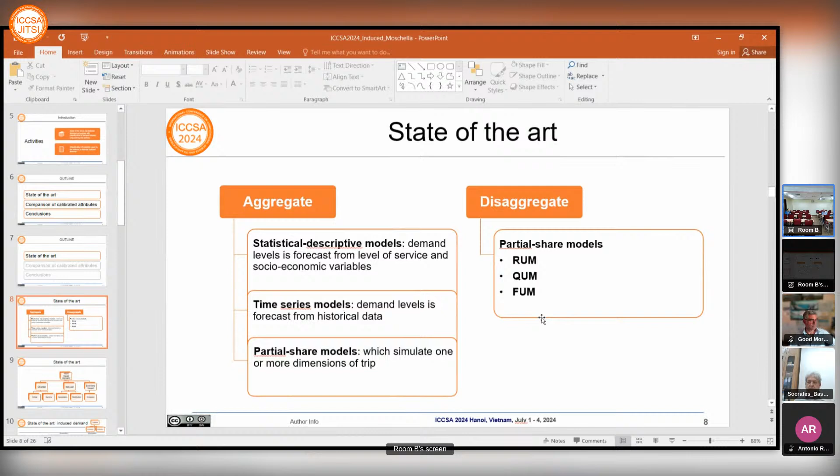The aim of HSR demand models is to estimate three demand components: demand diverted from other services or modes to HSR, which can be estimated with mode and service choice models; induced demand, which directly depends on the characteristics of the HSR service, or is indirectly modified by the traveler's mobility choices, and can be estimated with generation and distribution models; and finally, economic-based demand growth, which is linked to the trend of the national and international economic system, which can be estimated with emission models.

In this slide, I show you the papers reviewed in this work. 8 papers were selected in which the topic of induced demand was addressed, and the selected papers were analyzed according to 6 categories: the social context, like the country; the type of model, generation or distribution; the approach, statistical or probabilistic; the specification of the model; the presence of calibration; and the presence of the parameters. As we can see, most of the models are of the generation type, and they are mostly statistical.

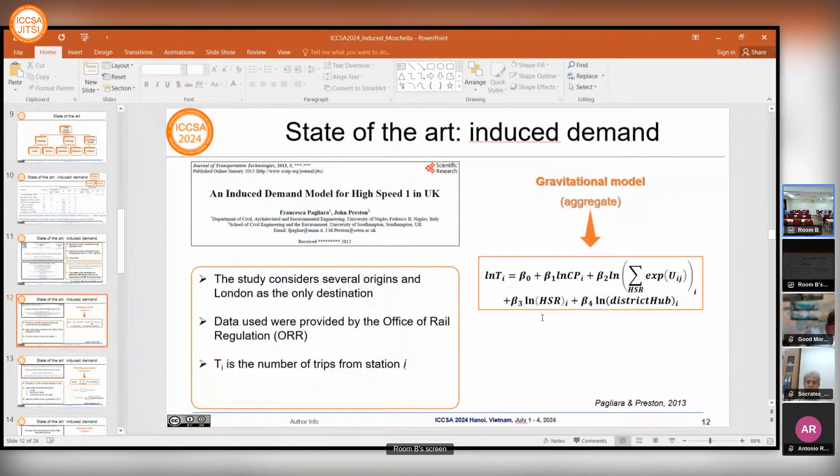In the study of Pagliara and Preston, induced demand is investigated by applying a gravitation model, an aggregate model, with the aim of predicting the change in the number of trips before and after the introduction of HSR in the UK. In particular, several origins were considered, with London as the only destination. For the estimation of demand, attributes of level of service were considered, as well as characteristics of the area where the high-speed rail is located, like the presence of car parking.

Cascetta and Coppola, in this paper, estimate the demand induced by the presence of HSR in Italy. In particular, a trip frequency model was applied with the aim of estimating the probability that a user makes a certain number of trips. The probability in the equation is estimated through a logit model with three alternatives: no trip, one trip per week, and more than one trip per week.

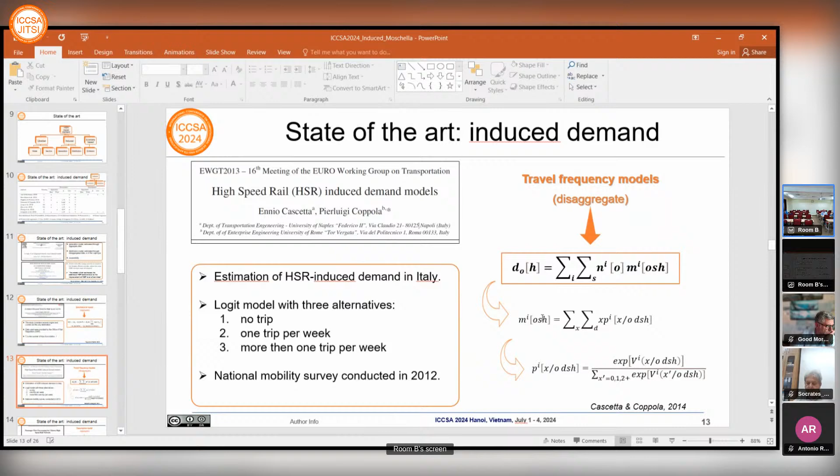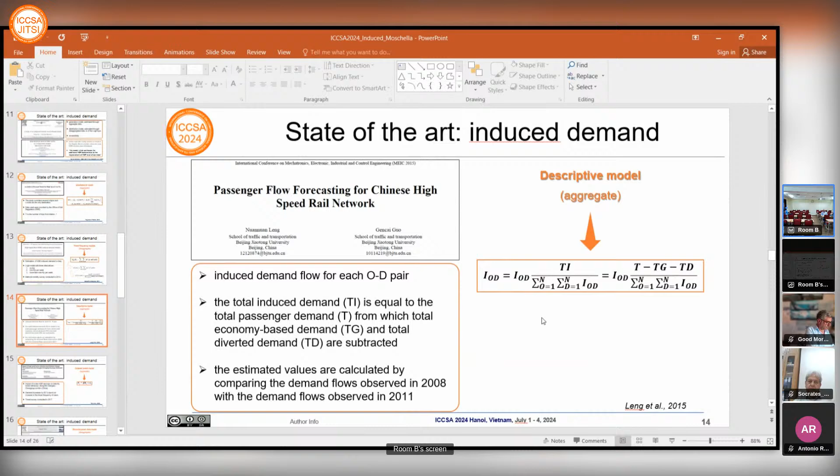The data were obtained from National Mobility Survey, conducted in 2012. Leng et al. estimated the induced demand flow for each pair in the entire Chinese HSR railway network using a trip generation forecast as a reference. The total induced demand equals total passenger demand, from which total economy-based demand and total diverted demand are subtracted.

This paper by Ren et al. analyzed the impact of a new HSR service on intercity travel behavior along the Changchun corridor. The results showed demand increased by 60% due to an increase of travel frequency. In order to estimate the induced demand generated by the presence of HSR, an ordered probability model was proposed by these authors.

The data used for this analysis was obtained from a travel survey conducted in 2011. In the study by Zhang et al., induced travel demand was analyzed in the context of a new mode in the Dallas-San Antonio corridor in Texas. The data were obtained through an online survey that included questions on socioeconomic factors, previous travel experience, and hypothetical parameters of the new mode, and were analyzed using an econometric model.

In particular, the authors selected a negative binomial panel data model. An important element introduced in this paper is the possibility of calculating the induced demand in relation to all combinations of travel time and cost.

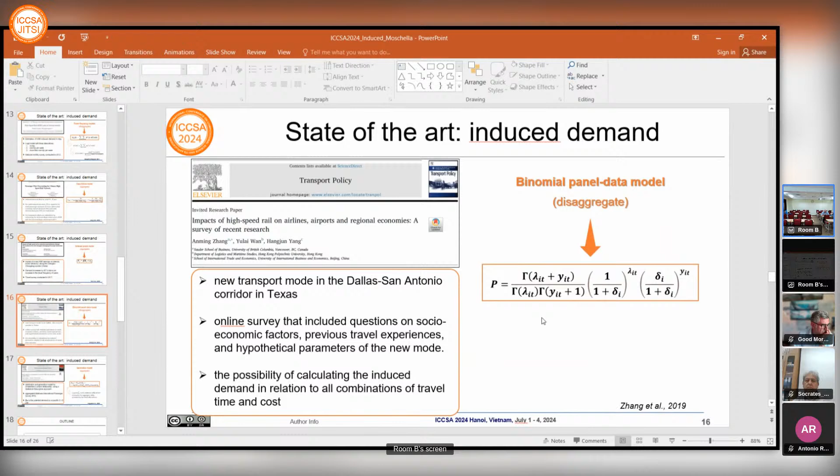The authors Avogadro et al. specify two aggregate models: a distribution and generation model for the Amsterdam-London relationship using a statistical descriptive approach. Of the two models, only the generation model was specified. For model estimation, they used data from the aggregate database International Passenger Survey, and they estimated the distribution model by aggregate regression.

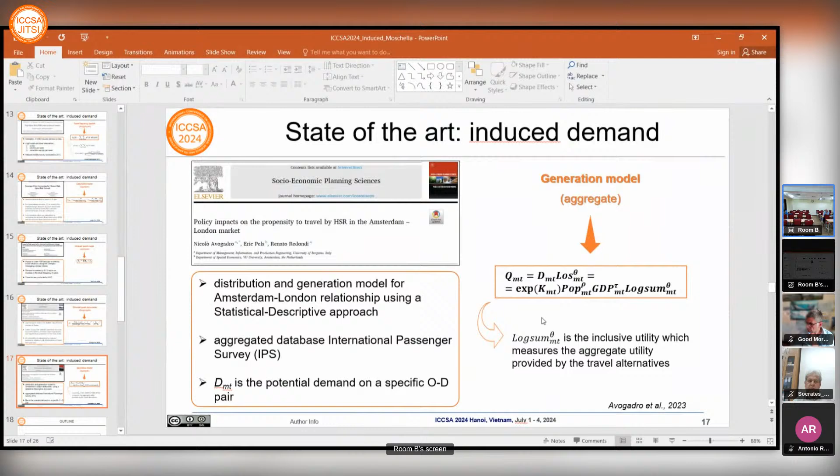The regression captured the difference between the modal share of air versus HSR according to differences between the attributes, while the generation model considers socioeconomic attributes for the OD pair and level of service. In particular, the log sum is an inclusive utility which measures the aggregate utility provided by the travel alternative.

Of the 8 studies reviewed, 5 contained calibration parameters.

The variables can have different structures: dummy variable, continuous variable, and discrete variable. From the comparison of the calibration results, some common variables related to the socioeconomic characteristics of the transport user emerge.

In particular, the gender variable in Cascetta-Coppola and Ren et al. is specified as a dummy variable equal to 1 for male and 0 for female. Moreover, the calibration results show that the value of the parameter is positive in Cascetta-Coppola and negative in Ren et al.

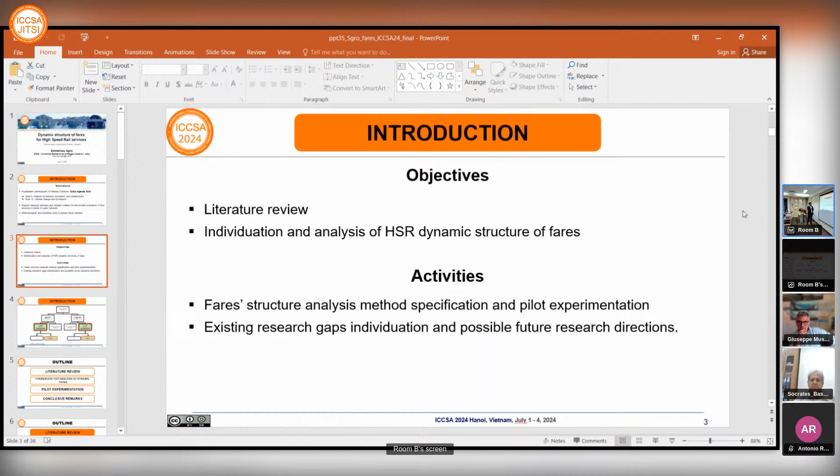We can identify fares as a level of service variable in both of the two main branches of the travel demand model, the aggregated and the disaggregated one. So the presentation is organized into four main sections: the first is the literature review, then the specification of the framework, meaning the specification of the method.

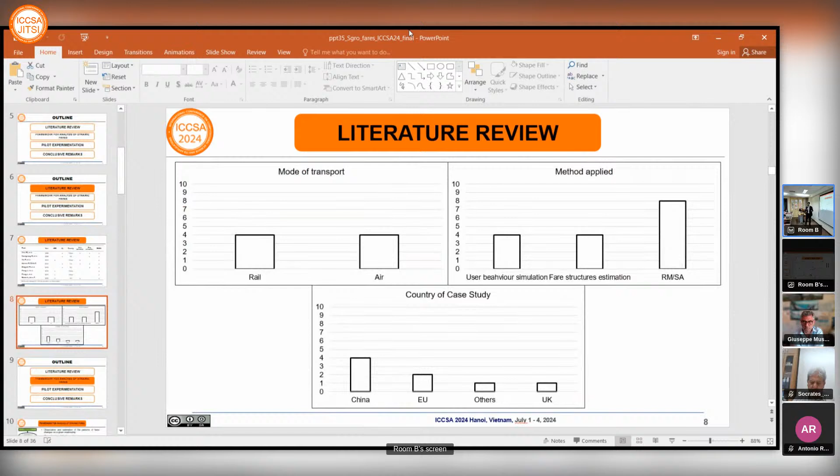In this slide are some charts about the data seen before. This section contains the specification of the experimental method of the fare analysis.

This is organized into three main steps. The objective step is preliminary to all the method, because it's important to individuate the objective of the analysis. In that case, it's the observation and estimation of the changes of the fares over time, on a specific relationship and on a specific country. Another objective is the analysis of the characteristics of this variation over time, and on the other end, the analysis of the services offered by the transport company.

So the first step is the definition of the analysis domain, and we can introduce the first two time variables. The first one is the T variable, that is the day of travel in a year - so when you want to travel.

The second time variable is the P variable, that is the day or period of ticket purchasing - so when you want to purchase the ticket. This is defined by a period because the ticket is not available all the time, so there is an initial P and a final P.

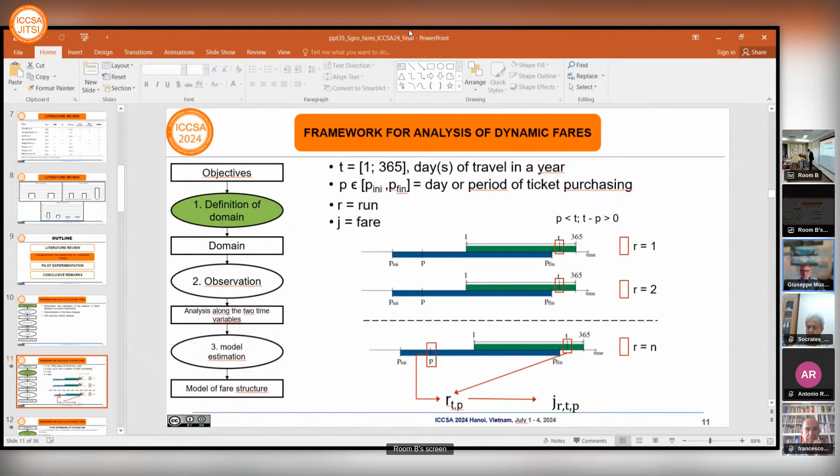Domenico, sorry, we cannot see the next slide. One moment... Are you seeing slide 12? Just a moment. No, I don't see the screen. I see the number 12. Well, we can go on if it's all okay. I asked the chairman if you see the slide, Professor. So I have to continue.

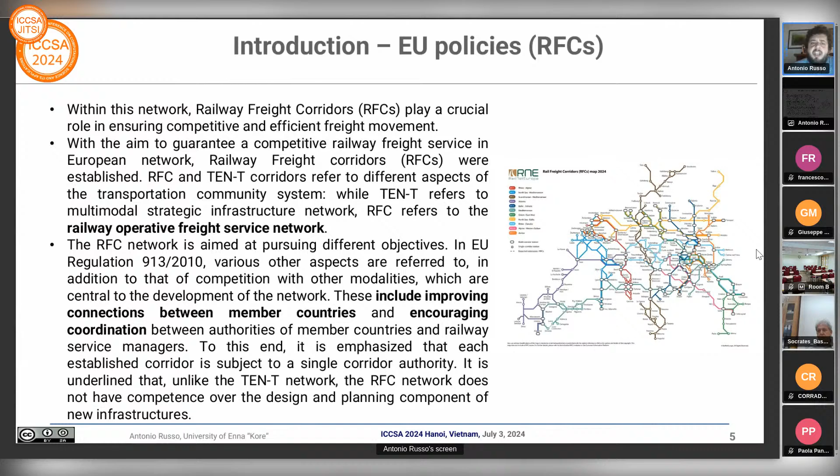The most important difference between rail freight corridors and the TEN-T network is that the former has nothing to do with strategic planning of new infrastructure, which is a main topic of the TEN-T network. On the other side, the RFC works only on existing networks.

The aim of the work is to compare the actual condition of rail freight corridors between Italy and the Balkans Peninsula, the two southern and southeastern peninsulas of Europe that may serve as a gateway from the Eastern world.

In general terms, we refer in this work specifically to 4 corridors: the two main Italian north-to-south corridors, the RFC-3 Scandinavian Mediterranean and the RFC-5 Baltic Adriatic, and the two main Balkans corridors, the RFC-7 Orient East Med and the RFC-10 Alpine Western Balkans, which links the southern Balkan Peninsula with Middle Europe.

The topic of this work is to understand the actual conditions of infrastructure between these 4 corridors, considering a common potential competition area that may be served by both couples of corridors, by both peninsulas, located approximately in Central and Eastern Germany, Poland, Czech Republic, and Austria.

For the modelization of the problem, we modeled it referring to classical graph theory, building a graph with n nodes and n links, each link characterized by specific quantitative elements, performing a Dijkstra algorithm every time we need to calculate the paths between 2 points. So every path is considered as the shortest path evaluated with the Dijkstra algorithm.

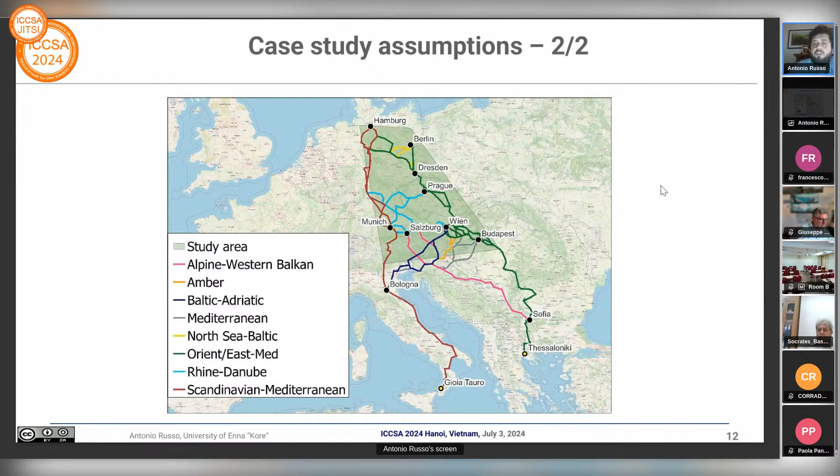These are the best results, the results of the comparison between results for distances to Thessaloniki. Points are marked red if the border between Bulgaria and Serbia is an intermediate step, while they are white if they are in a competition area.

As you can see, all the points from Sofia to Budapest are nearest to Thessaloniki through the Orient East Med corridor, while more or less all the points in the central and western part of the study area are nearest to Thessaloniki through Western Balkans, with a great competition area placed on the axis from Budapest to Hamburg. This may lead to some interesting results that may be discussed in the discussion section of the work.

For the comparison between the two Italian corridors, the situation is clearer somehow, because we have all the points to our north that are nearest to Gioia Tauro, considering the Brennero intermediate step, so the points on the Scandinavian Mediterranean corridor, while all the points in Balkans and other central and east countries will be marked as Baltic Adriatic.

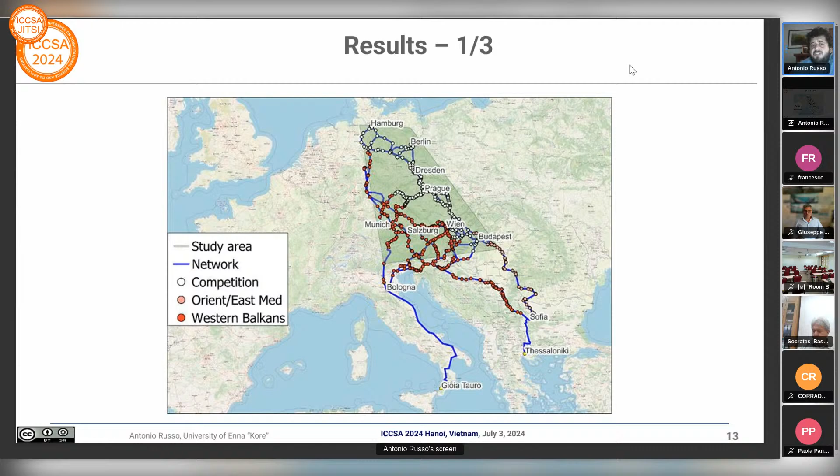So while the Italian situation is more simple, for this case, even if there are points nearest to one city more than the other of the two cities considered, we should consider that the two peninsulas have strongly different problems. The Italian railway network is often subject to congestion, while on the other side, the Balkans Peninsula from Greece to north has various problems in terms of infrastructure.

For the development of successive steps, we worked only on distances, but other parameters may be included to properly construct a cost function, considering, for example, the number of corridors counted as elements, or the possibility to consider duration of stops at borders or at other particular nodes. Another element would obviously be to involve demand components, while this work is essentially about supply elements.

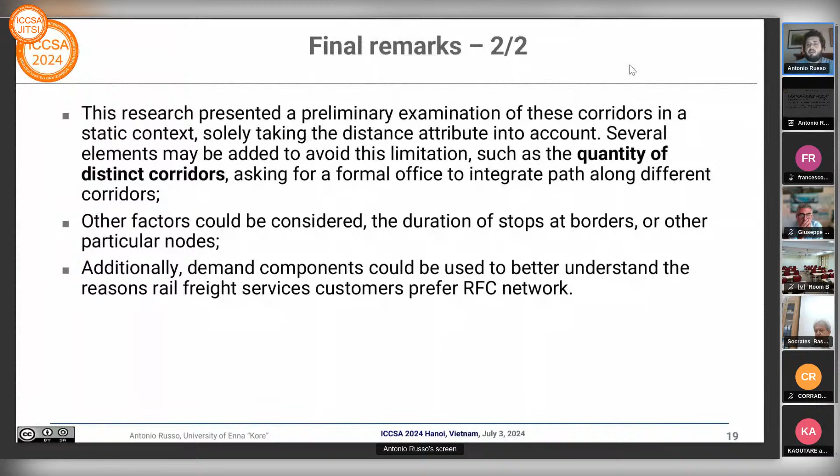Finally, we should consider how impactful Greek corridors may be, other than being competitive for the relationship with Northern Europe, may also be related to the Eastern world through international rail freight corridors with China by east. So thank you for the attention.

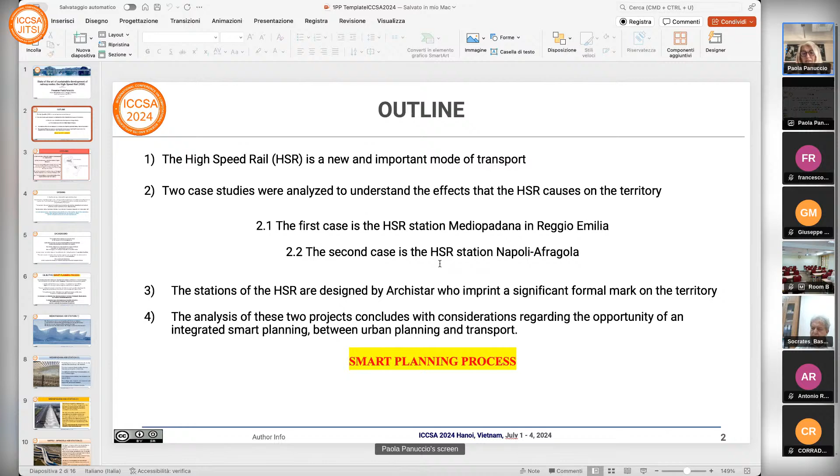These two case studies were chosen because they are two modern stations, both designed by Archistar, but located in socially and economically different areas. The first station is in northern Italy, in the region with the highest gross domestic product. The second is in southern Italy, in the region with low GDP.

In Italy, the territory is planned through restrictive plans. In recent years, important projects with strong transformative impact have been induced by superior choices. As a result, territories are forced to change quickly and don't follow the indications programmed by urban plans. The top-down choice imposes irreversible transformation decided by international directives but not planned by local urban planning.

The inclusion of a new mega infrastructure determines a new territorial identity. The high-speed rail line, which connects cities with the rest of the country, represents a substantial change with significant implications for the evolution of cities and for increasing social and economic development.

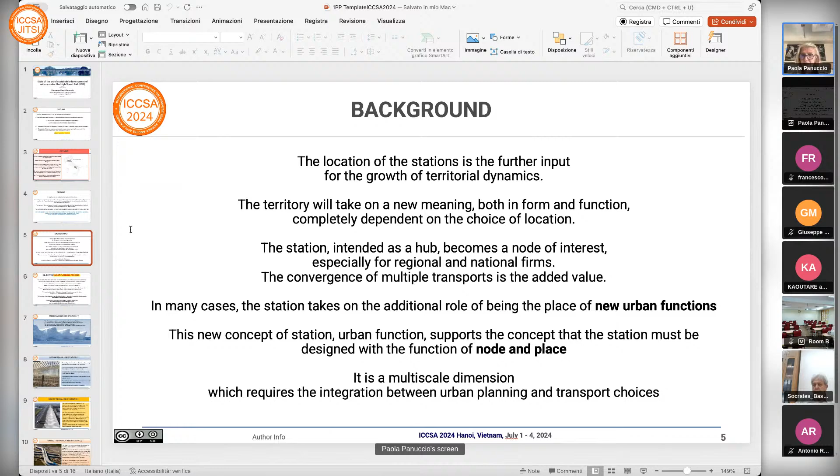The station, intended as a hub, becomes a node of interest, especially for regional and national firms. The convergence of multiple transport modes is the added value. In many cases, the station takes on the additional role of being the place of new urban functions. This new concept of station-urban function supports the idea that the station must be designed with the function of node and place. This is the multi-scale dimension, which requires the integration between urban planning and transport choices.

The location of the HSR station is important and makes a difference to the host territory. The construction of a new station, if planned, will promote local economic growth. It can be said that the success or failure of investment on the HSR line depends on city-region-nation integration and station-city dynamics. Transport networks increase connectivity, stimulate economic growth, and reshape the geographical distribution of economic activity inside and outside the cities.

The construction of stations has significant impacts on the cities to which it is easily and quickly connected. It's necessary to integrate urban planning choices with those of transport infrastructures in an ordinary integrated urban plan. A comprehensive and integrated plan benefits innovations and the transformation of cities into smart cities and the sustainable development of territories.

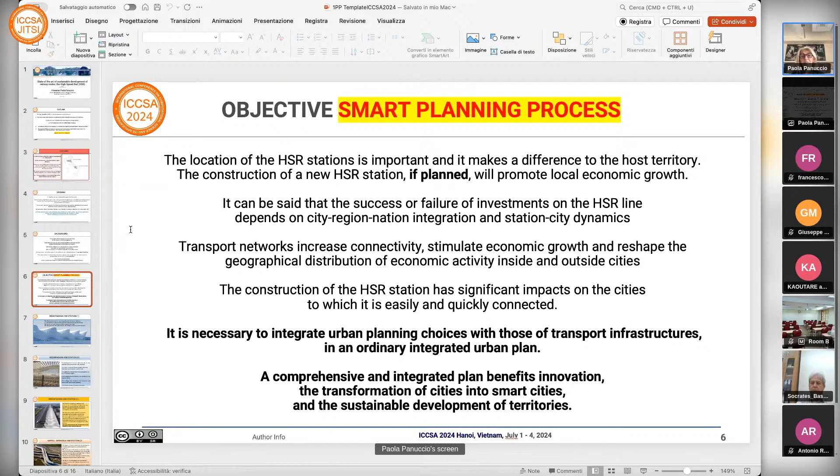Now we present the case study. The first is the Mediopadana station, designed by the architect Calatrava. It is an impressive architectural sign that testifies to its special function. The station is a steel structure, 480 meters long and about 20 meters high. The structure has a futuristic design, and the image is similar to a moving wave.

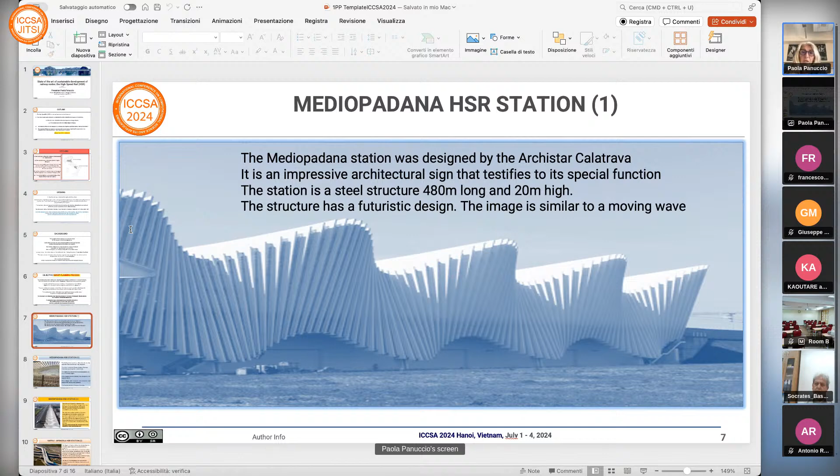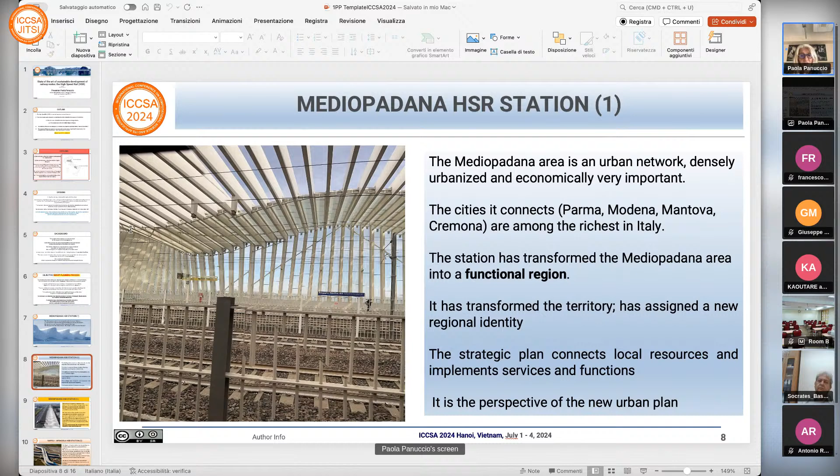The Mediopadana area is an urban network, densely urbanized and economically very important. The cities it connects, Parma, Modena, Mantova, Cremona, are among the richest in Italy. The station has transformed the Mediopadana area into a functional region. It has transformed the territory and assigned it a new regional identity. The strategic plan connects local resources and implements services and functions. It's the perspective of the new urban plan.

The presence of a parallel motorway is an attractive factor. Growth is strongest when the motorway is connected to the high-speed station. Integrated transport connection is considered to be the priority.

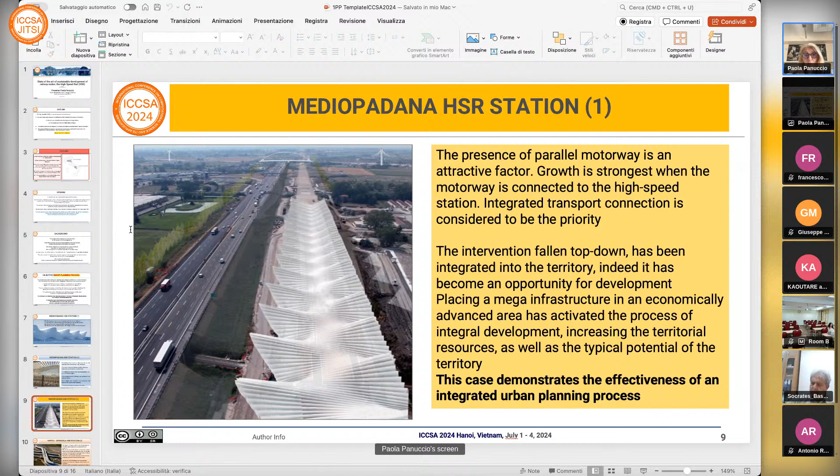The top-down intervention has been integrated into the territory, and indeed it has become an opportunity for development. Placing a mega infrastructure in an economically advanced area has activated the process of integral development, increasing the territorial resource as well as the typical potential of the territory. This case demonstrates the effectiveness of an integrated urban planning process.

The Napoli-Afragola station was designed by the architect Hadid. It is a strong territorial landmark, and the central part of the station is characterized by a large sinuous bridge, about 400 meters long, crossing the tracks at an average height of about 9 meters, organized on 4 levels.

The station has a potentially large catchment area, a gateway between Europe and the South. The station is surrounded by an area with low economic income, with obvious urban and social problems. A territory with considerable development potential appears unusable because, in reality, it is not connected.

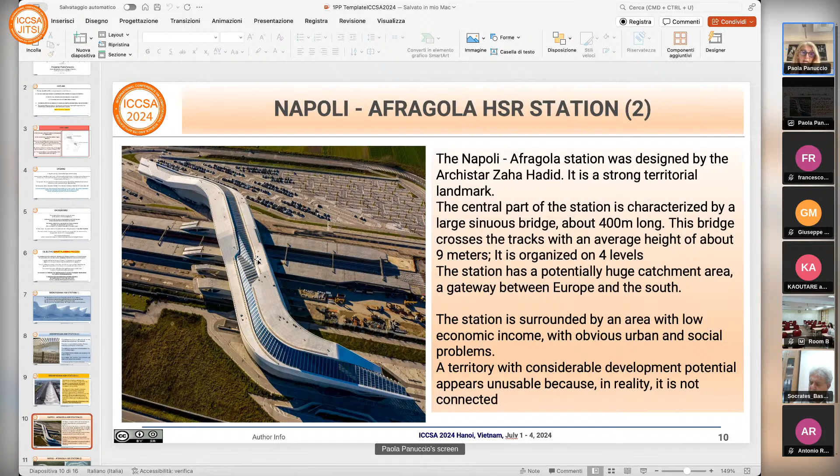The main causes of the nothingness around are the economic and social difficulties of the area, the lack of an integrated plan, missing connections, incomplete motorway junction, and insufficient public road transport. The station is unable to give the right impetus to the surrounding area.

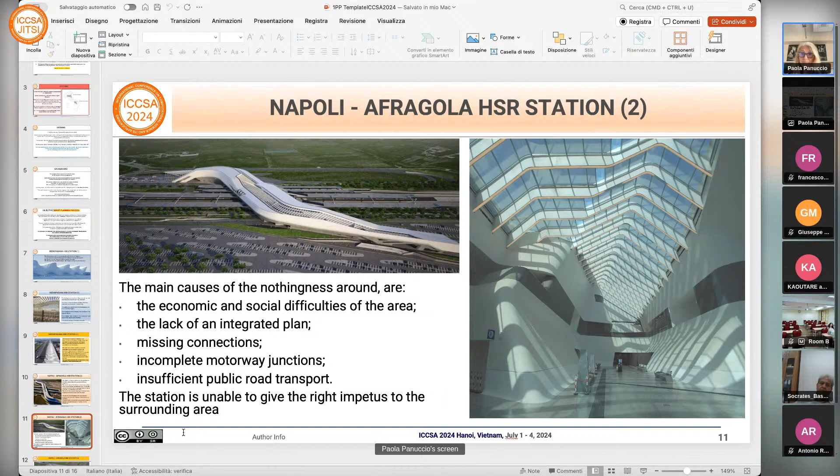At the moment, the station is served only by local public transport with 7 bus lines, waiting to complete the Cancello variante and the interconnection with the Napoli-Baiano line of the Circumvesuviana, the Metropolitan Railway Network.

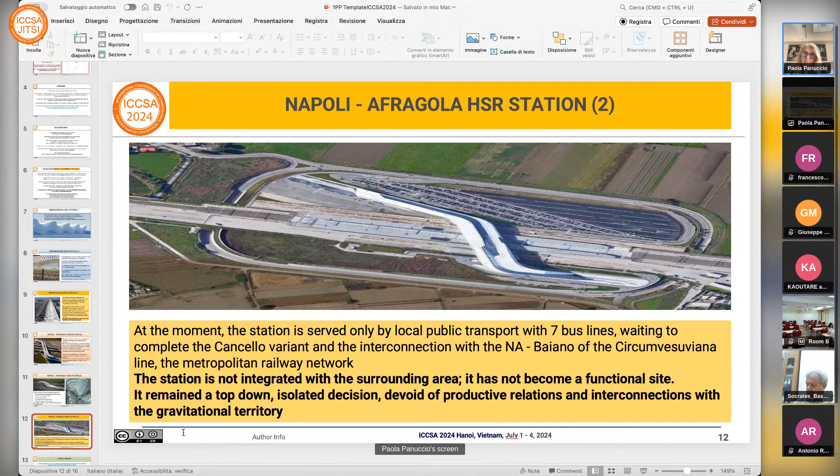The station is not integrated with the surrounding area. It has not become a functional site. It remained a top-down, isolated decision, devoid of productive relations and interconnections with the gravitational territory.

Conclusion. Territorial dynamics are sets of interconnected processes which generate new identities, drawn from the constitutive characteristics of sites, landscape, historical and cultural resources, and housing habits. HSR is the indispensable connection for innovation and development of the national territory and local systems.

From the comparison between Medio Padana in Reggio Emilia and Napoli Afragola, it's possible to understand what determines the positive attractiveness of a mega infrastructure.

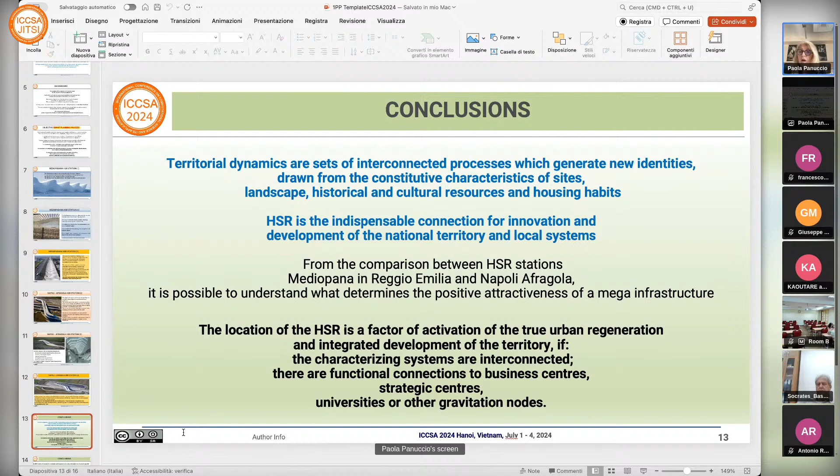The location of the HSR is a factor of activation of true urban regeneration and integrated development of the territory if the characterizing systems are interconnected, with functional connections to business centers, strategic centers, universities, or other gravitation nodes. The station, if included in a strategic integrated urban plan, stimulates local economic growth.

The new conceptual approach integrates urban planning choice with the transport infrastructure system. It pushes towards technological innovation and transforms territories into smart urban regeneration interventions with an integrated vision of the future, achieving the sustainable development objective through smart city categories.

The determining factors for the success of the choice of station location are high accessibility, intermodal node, ability to trigger new functions, and supply of services and activities in the neighboring urban system.

A further factor of positive attractiveness is the presence of territory available to increase the urban regeneration process. Territorial deficit can be resolved with urban rebalancing action through smart planning process.

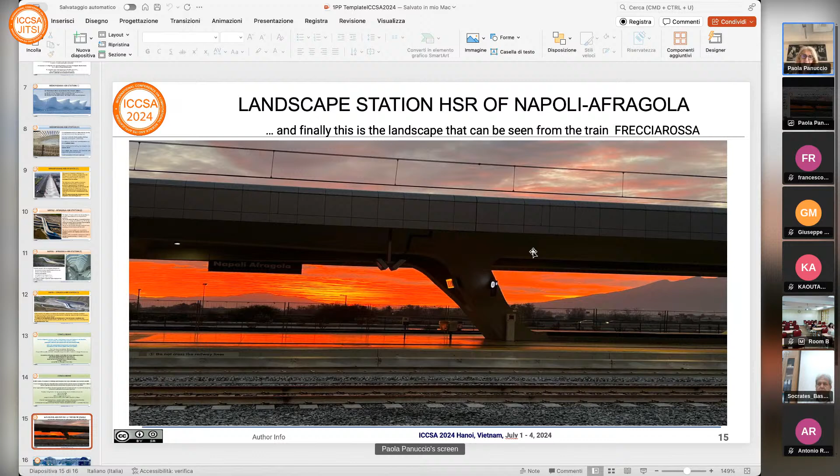And finally, this is the landscape that can be seen from the train Frecciarossa, Napoli Afragola. Thanks.

Well, thank you very much, Ms. Panuccio. A very impressive presentation. Congratulations. I think it's a valuable work for city planners, for people working in decision making and decision taking as far as the urban space is concerned. Are there any questions?

Okay, I only have one question. What about the cost of such projects? How important is the cost when we consider the contribution of high-speed rail nodes in sustainable development?

The cost is very important, and the realization is possible through the different implication of the Ferrovie dello Stato and Ministero dei Trasporti. But the impacts on the territory, if included in a strategic plan, can reduce the negative effect and compensate with new offer.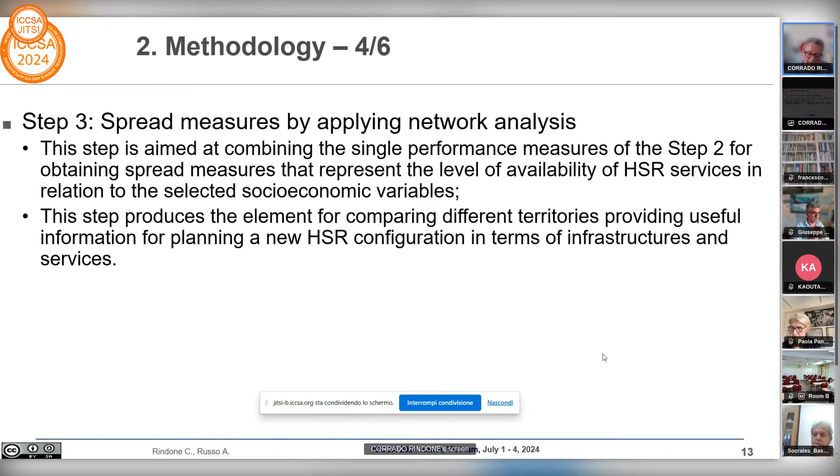With this information, it's possible to apply network analysis in order to combine performance measures connected to the performance of HSR services, and compare the availability of each HSR service with socio-economic variables, to see if there is a correlation, or whether the availability of services is justified by socioeconomic indicators.

For this reason, it is necessary to apply a network analysis approach, starting from the construction of an adjacency matrix, which is the input for all network analysis. In each element of this matrix there is a 1 if there is a connection between two different regions, or 0 otherwise.

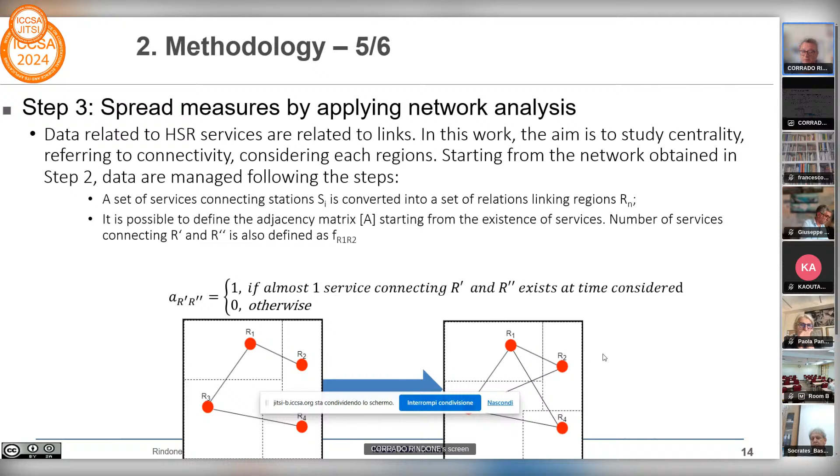Starting from this matrix, it's possible to introduce and measure three different indicators known in the field of network analysis. The first is the total degree centrality, which measures the number of connections starting from a node.

This is a measure of each node, that in our case are the regions of a national country, for instance. In this case, we measure only the possibility to connect, to have a direct connection between a couple of regions.

In the second indicator, that is strength centrality, we measure the quantity of connection that, in our case, are for instance the quantity of HSR services that connect to different regions.

The third indicator, that is eigenvector centrality, measures the role of each node within the network. It is possible to have a sort of ranking between the different nodes.

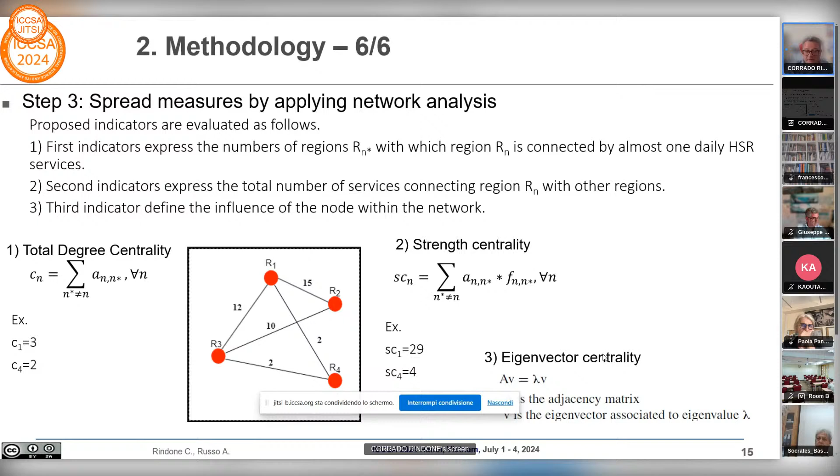Then the set of these three indicators can be compared with the socioeconomic characteristics of the study area. This methodology we try to apply in the south of Italy.

We consider all HSR services in the Italian region, but specifically those that connect to different regions, operated by the two operators in Italy, Trenitalia and NTV. For this reason, we consider all connections starting from the regions in the south of Italy.

Also, with this mobility services indicator, we consider the mobility-related attributes in relation to, for instance, kilometers of infrastructure per region, and the socioeconomic, socio-demographic attributes in relation to gross domestic product and population.

Then, starting from the whole network of HSR infrastructure and services, we consider only the connections between the regions in the south with the other regions in Italy.

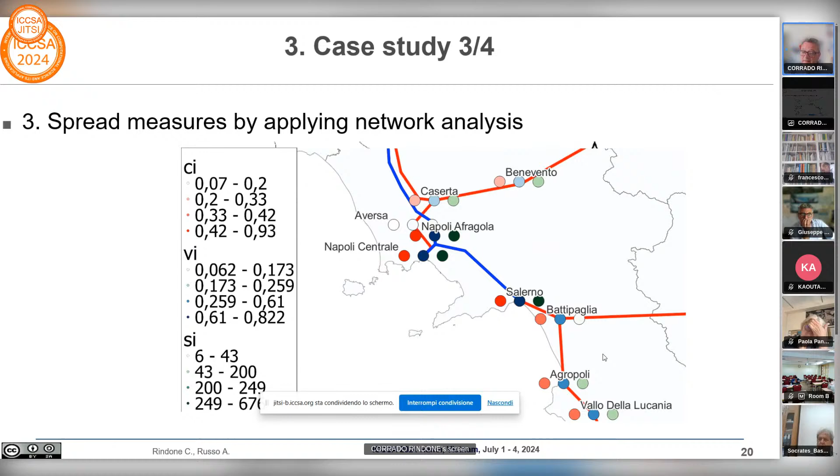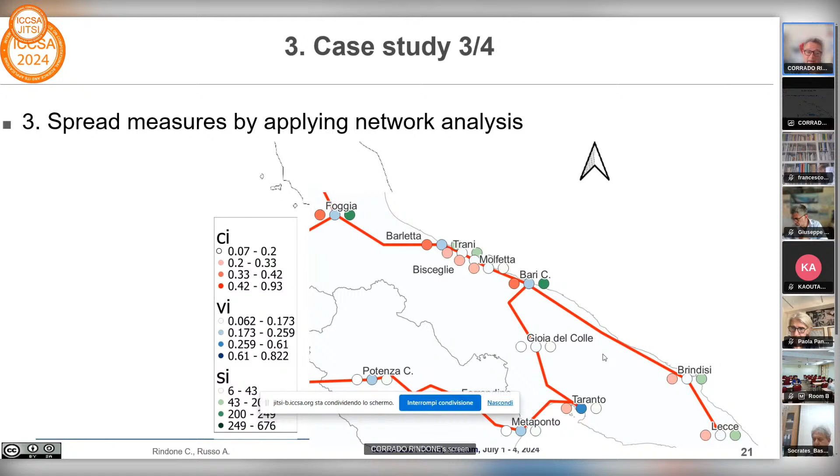This is because there are low connections between Puglia and Calabria, and for this reason the numbers that the network analysis produces are lower than Campania. Finally, it's possible to see the role of each station in the Calabria region.

It is necessary to underline that these connections are related to the Mediterranean axis, and in particular, in the current situation, Calabria and Reggio Calabria connect with Napoli and Rome.

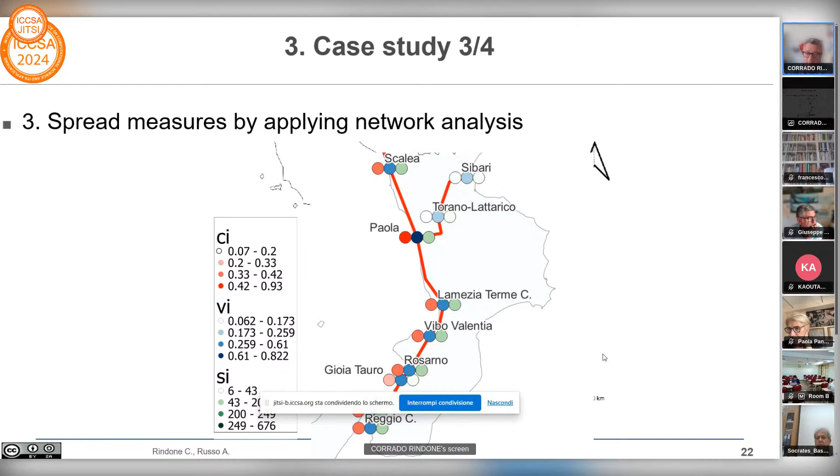Now, in this slide, we present the great number of the three indicators that are connected to Rome, Napoli, and Salerno.

These indicators are compared with the socioeconomic attributes, and it is necessary to see that there is a sort of disequilibrium between the strength centrality and population.

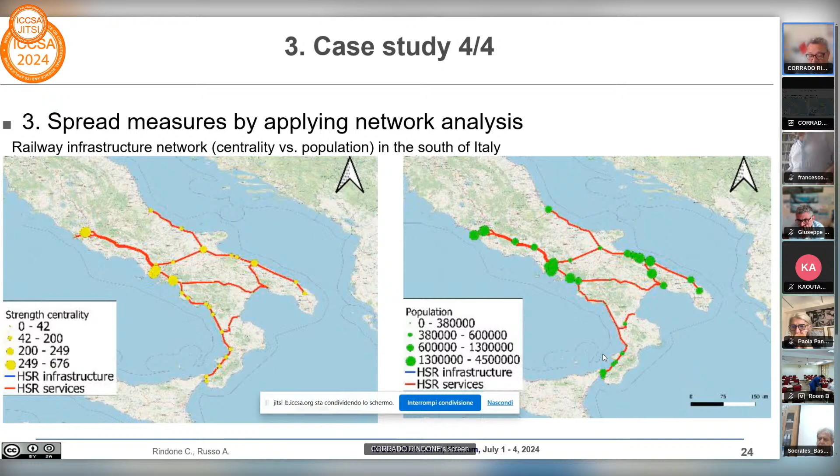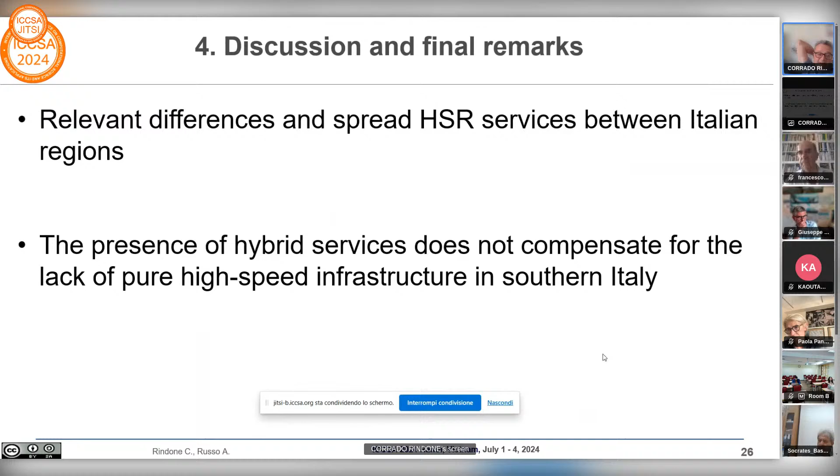Another important result is the relevant difference and spread of HSR services between Italian regions. In fact, despite the presence of hybrid services, these services do not compensate for the lack of high-speed infrastructure in the south of Italy.

The first consideration is that there is no possibility to connect the Tyrrhenian and Adriatic directions, and Taranto represents the only node connected with Naples and Bari.

It is important to see and underline the role of Villa San Giovanni, despite the physical discontinuity with the Sicily region. It is important to underline the potential market for HSR infrastructure and services represented by the Sicily region.

Finally, it is necessary to underline the lack of HS services connecting the territories of southern Italy, the disconnection with the island regions. Excluding Sardinia, the Sicily region remains completely disconnected from the rest of Italy, also in relation to hybrid services.

Another final result is the lack of railway network hierarchy. In the future, considering the limits of this work in terms of data, or the necessity to consider intermodality or other railway services, for instance other conventional services like intercity, it is necessary to develop other indicators for evaluating HS options for the south of Italy and the new current project for the Salerno-Reggio Calabria line.

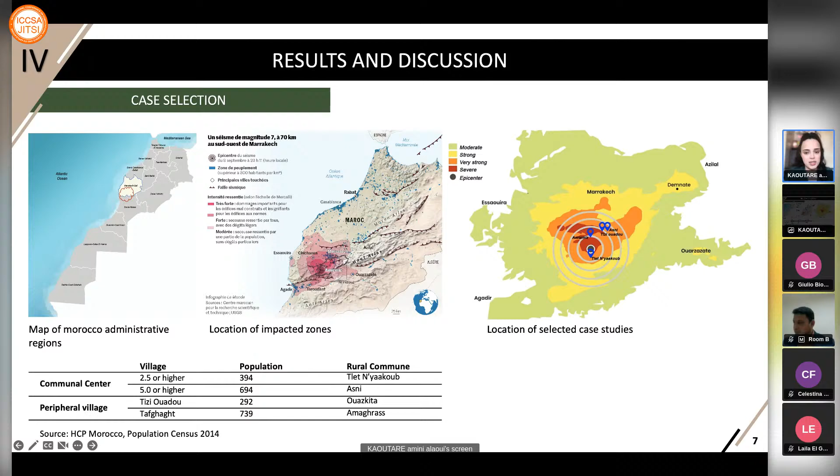These villages, differing in geography and size, offer a comprehensive view of transient housing initiatives and community adaptability in the aftermath of the disaster. Through the study, we found that while tents provided immediate relief and privacy, their uniform design often fell short in harsh environmental conditions and did not really meet the longer-term spatial needs of the residents.

Local communities, however, proactively modified and rearranged these tents, using their understanding of the landscape and daily routines to create more suitable living conditions. They adjusted tent placement to maximize shade and airflow and expanded living areas to accommodate multi-generational living, reflecting their cultural preferences and practices.

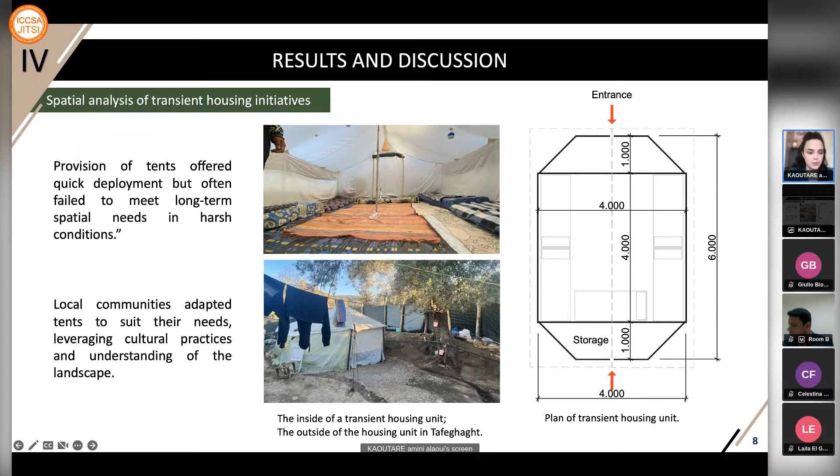This adaptation highlights the need for flexibility and cultural sensitivity in designing transient housing solutions. The shift from isolated tents to more integrated communal clusters represents a significant evolution in transient housing.

Rectilinear clusters, often found in areas permitting systematic planning, maximized efficiency and facilitated resource distribution. In contrast, organic layouts adapted to the terrain and residents' daily activities, preserving rural lifestyles. These adaptable clusters not only met practical needs, but fostered community resilience and social interaction.

Our research reveals housing responses in Morocco's Al Haouz region post-earthquake. Satellite imagery highlighted the extent of damage and emergence of new communal areas, demonstrating a resilient and adaptive approach to post-disaster housing. Central villages like Asni and Tlet N'yaakoub to the left.

Organized structured clusters, akin to Japanese disaster management, optimizing resource sharing. These setups offer more structured and planned community interaction, yet are not very adaptable.

While peripheral villages to the right, such as Tafghaght and Tizi Ouadou, maintain dispersed housing, similar to Nepal, preserving agricultural livelihood. They adapted to topography and maintained their daily organizational lifestyle and had more freedom in implementation and localization.

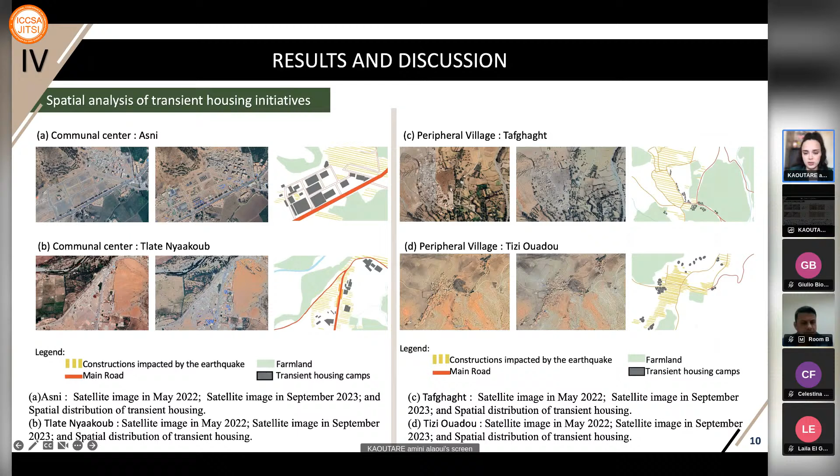Our survey revealed resilient communities with an average household size of 5.4, favoring quick-assembly, thermally comfortable materials from governments and local sources. Despite limited resources, there was strong communal support and shared problem solving.

Communities showed resilience by modifying local materials for quick assembly. This approach contrasted with global practices recommending the use of containers, but highlights the inner solution thinking, potential, and need for sustainable, adaptable transient housing.

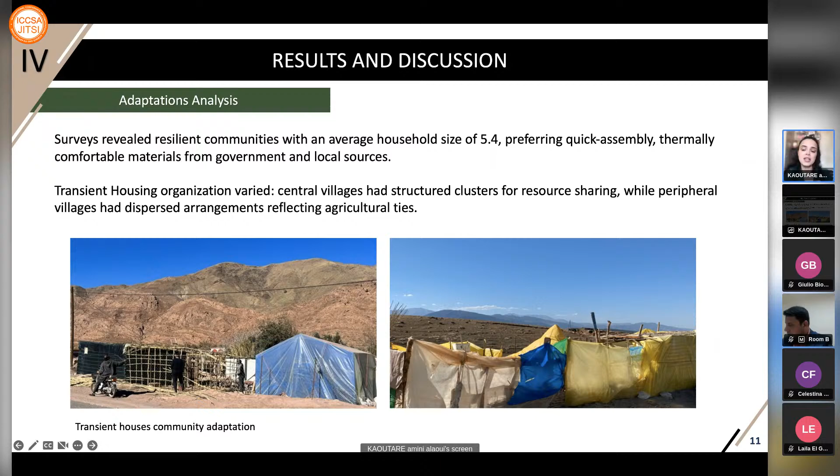Moroccan communities' proactive modification underscores the importance of strategic planning rooted in community collaboration specifically. This dynamic process of adaptation and resilience ensures sustainable growth and preparedness for any future disaster.

Overall, Morocco's earthquake recovery intertwines cultural resilience with environmental strategies and social unity. Strategic planning here is not just about rebuilding, but cultivating a culture of resilience and sustainable development. Local adaptations highlight the need for flexible, accessible, and sustainable solutions.

Even though centralized or peripheral areas show different paths and approaches, this proactive strategy ensures communities grow sustainably and remain prepared for any future disaster. To wrap things up, transient housing in rural Morocco used after the last earthquake highlights remarkable community resilience and adaptability.

Either central or peripheral villages showed unique responses, reflecting cultural and geographical realities. The comparison with international examples underscored the importance of balancing immediate needs with long-term sustainability and cultural integrity. Our findings emphasize the need for strategic, context-specific emergency planning and community-driven solutions, contributing valuable insights to the global discourse in post-disaster recovery. It mainly opened the research about rural strategic planning generally, lacking documentation, yet very rich of opportunities to explore toward dynamic territories and resilient communities.

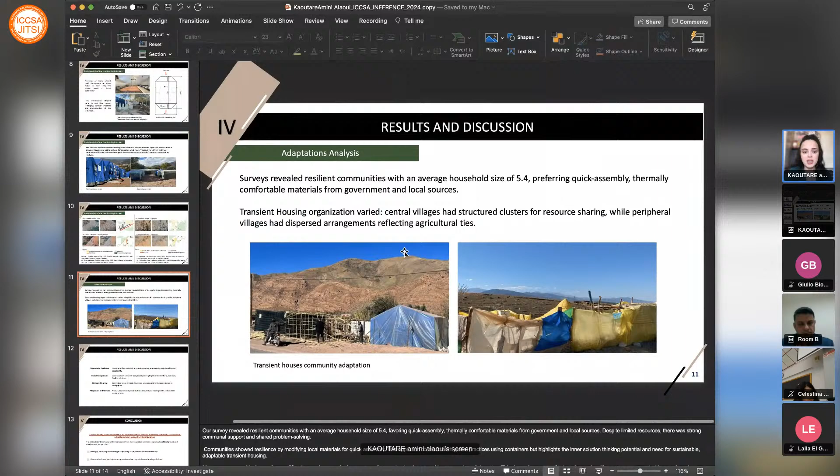I want to share this picture, for example to the left, that was taken after the earthquake. This category of structure made of Moroccan bamboo is very commonly used in gardens or open spaces, in rural and also urban areas. So they already have developed these kinds of methodologies that they used back then with the available materials.

This also showed their resilience, the inner resilience of these communities, social resilience, and the infrastructure they already have, but that they maintained and developed to use in this critical period. As we see now, around one year after the earthquake, the population has shown a lot of resilience and manifestations. They have already started reconstruction, but this helped them go through the difficult periods during this year.

Absolutely, very well thought out, Kaoutare. I'd like to mention here, because when you have community engagement and culture, which is a decades-long culture, that's really helpful to understand how they can quickly recover from a shock like an earthquake, and then how they can build resilience towards the future. And definitely it's interesting because this is the context of Morocco, which is a very unique context in terms of geography versus touristic spots and all those.

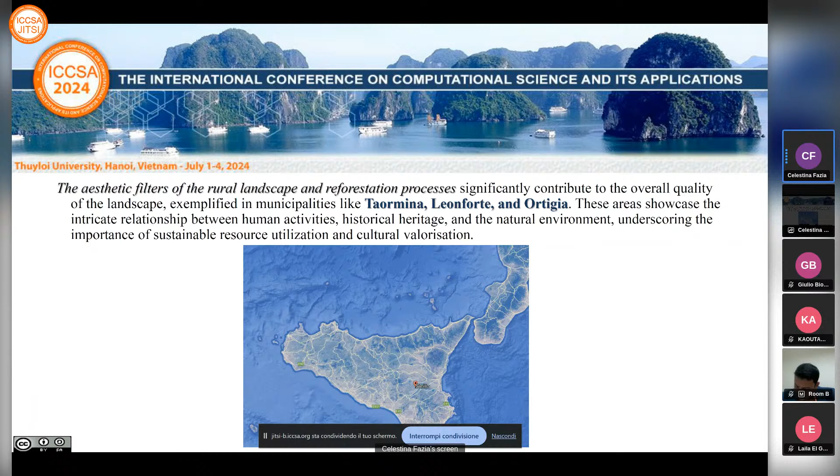In another way, the aesthetic filter of the rural landscape and the reforestation process significantly contribute to the overall quality of the landscape, exemplified in municipalities like Taormina, Leonforte, and Ortigia. These areas showcase the intricate relationship between human activity, historical heritage, and natural environments, underscoring the importance of sustainable resource utilization, and cultural valorization. So an example for Enna, Leonforte, so different also the city in Sicily.

The Sicilian landscape has undergone significant transformation due to technological innovation in agriculture, leading to the loss of its historical agricultural character. Landscape plays a crucial role in architectural design and urban planning, serving as a valuable resource that requires continuous care and attention. The quality of the landscape and open space is essential for ecological transition and sustainable development.

Coastal cities face unique challenges and opportunities due to their proximity to water. Urban and landscape rehabilitation projects in coastal cities must consider the presence of water as both an asset and a potential complication. For example, climate change accentuates the complexity of coastal city design, requiring innovative solutions to address the impact of storms and erosion on coastal infrastructure.

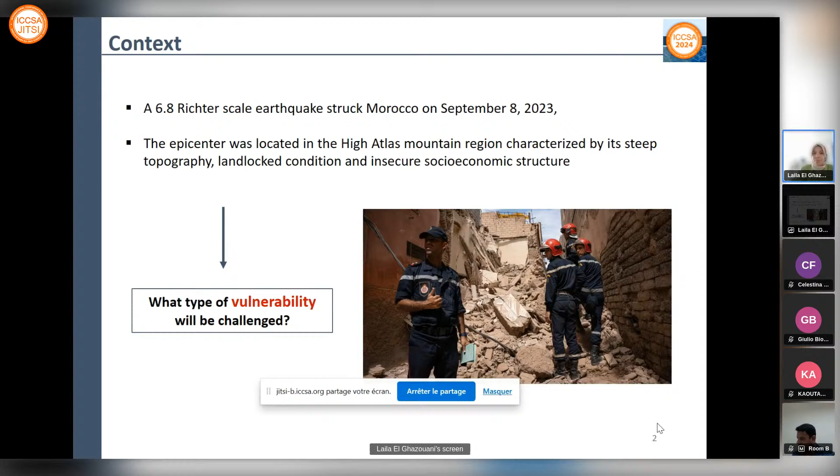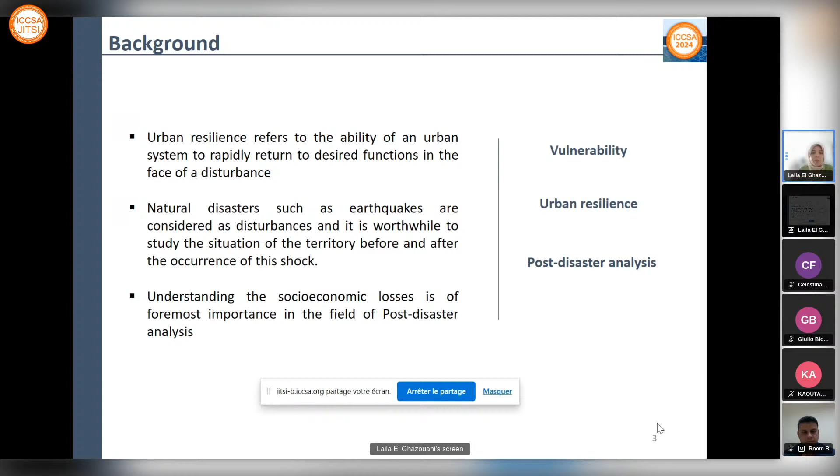In this sense, we were led to first ask about concepts of vulnerability, urban resilience, and post-disaster analysis. Urban resilience refers to the ability of an urban system - whether urban, territory, or rural system - to rapidly return to desired functions after a disturbance. Natural disasters such as this earthquake are considered disturbances, and it's worthwhile to study the situation of the territory before and after, understanding also the socio-economic losses, since now we are addressing the theme of post-disaster analysis.

To do so, we outlined two main objectives for this paper. The first is how we can use satellite imagery and GIS to visualize and calculate the extent of damage for buildings, infrastructure, and people. The second objective is about modeling a composite index to assess vulnerability of the affected populations.

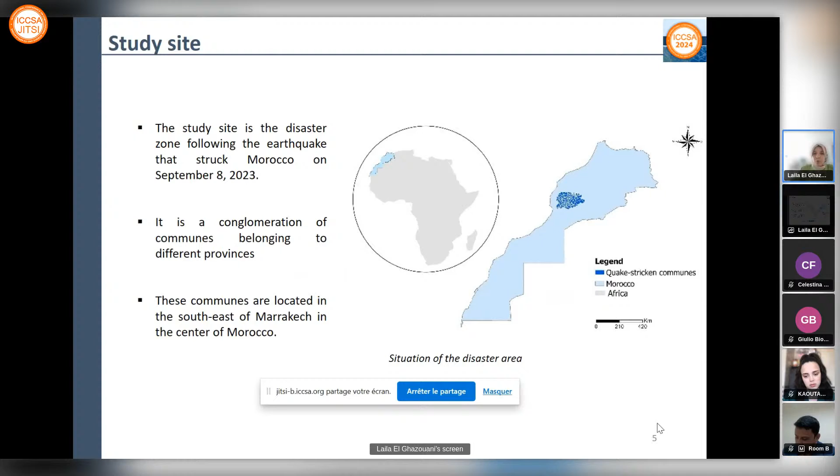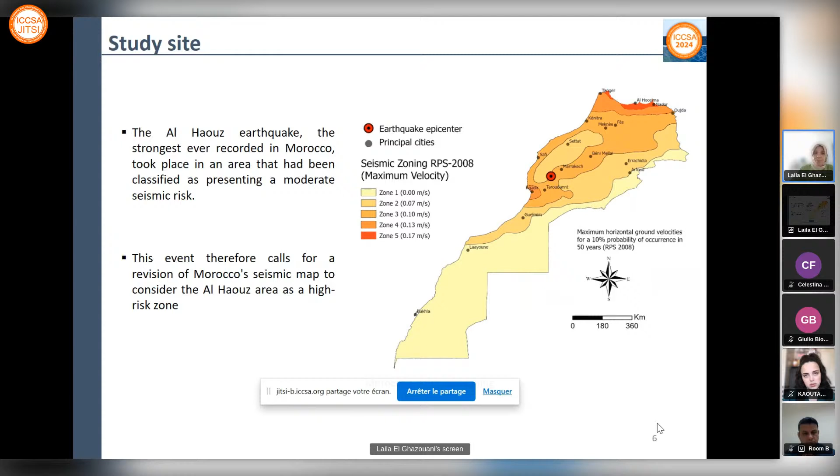The study site is the disaster zone following the earthquake that struck Morocco on September 8, 2023, a conglomeration of different communes belonging to different provinces, all located in the southeast-center of Morocco. The Al Haouz earthquake, the strongest ever recorded in Morocco, took place in an area that had been classified as presenting only moderate seismic risk, not very high. This event therefore calls for revision of the seismic map to consider this area as a high risk zone. Here in this map we have the epicenter and seismic intensity distribution across all the communes affected.

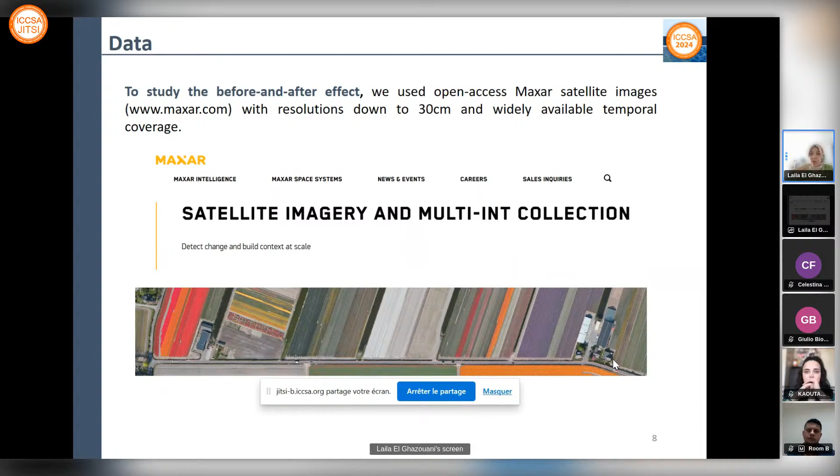So how did we use data to achieve the objectives designed for this study? We start by studying before and after effects, using open access Maxar satellite images available on maxar.com, which had good resolutions down to 30 centimeters and wide temporal coverage.

As we discussed two aspects - the before-after earthquake and the vulnerability - for the second part about vulnerability, we used data from government institutions that produced the national census in Morocco. We extracted a range of information, classified into three aspects: demographic, socio-economic, and infrastructure aspects. For every aspect, we had 5-6 data points related to activity rate, poverty, illiteracy, population, and density.

About results, we had 3 different results according to our objectives. So at first, we start by

analyzing all this visualization of the post-disaster when we used data from maxar.com. And here we combined high-resolution satellite imagery and artificial intelligence, so we were able to assess all the damage caused to buildings.

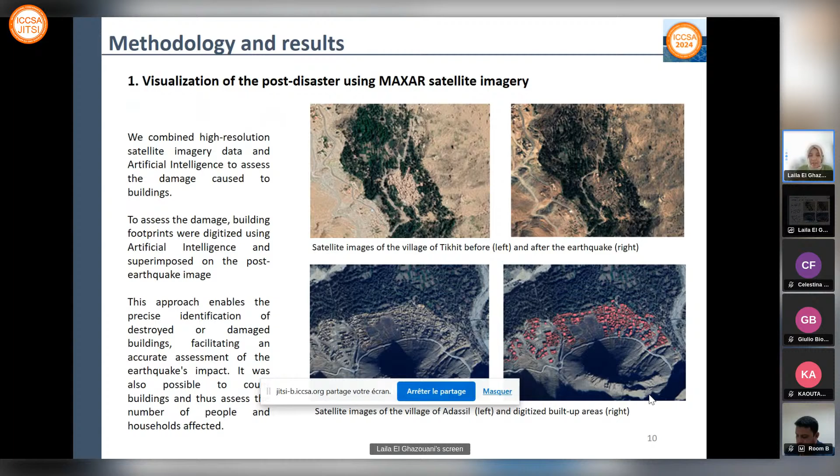And when you say buildings, it's also people living there. And footprints here on the left, we can see it before and after the earthquake, and we superimposed the post-earthquake images. So these approaches enable precise identification of destroyed or damaged buildings, facilitating an accurate assessment of the earthquake impact. It was also possible to count buildings and assess the number of people and households affected.

The second part was about studying the vulnerability by using a composite index with the calculation method of the composite index. So here, 3 aspects: demographic, socioeconomic, and infrastructure. And all this index was built according to the usual method with 3 steps: standardization, weighting, and aggregation.

And young population is also seen as opportunities and challenges for vulnerability, because the segment of population, especially people under 60 years old, may bring considerable energy and effort for the development and sustainability of the territories, but also they require specific investments and actions in terms of social development in general, so we can ensure and achieve their inclusion and engagement in long-term reconstruction of the earthquake affected areas.

The second part was about the socioeconomic aspects, as I said, about poverty, illiteracy, and we remark that for most of these communes, this vulnerability is above average, and rates of poverty, illiteracy, and unemployment reach worrying levels and appeal for urgent actions in this sense.

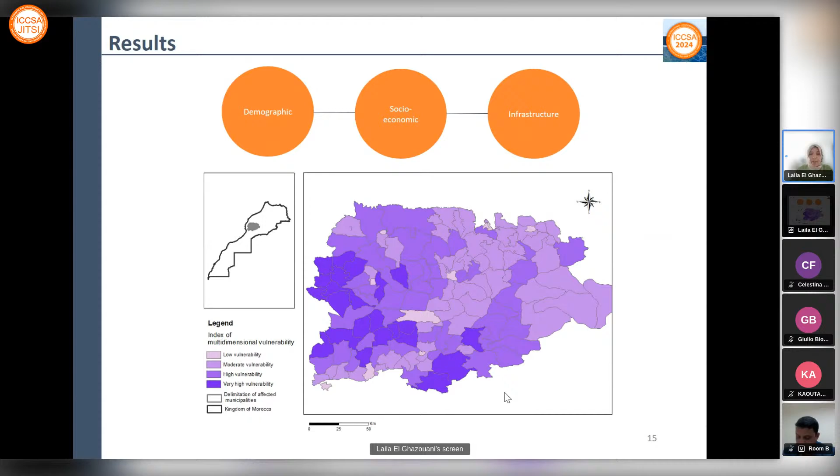The third part, which is very relevant and perfectly suited for Morocco's urgent need for post-earthquake reconstruction. Here we proposed a synthesis between a physical fact, which is the earthquake, and the fact that we studied, which is vulnerability. And we were able to overlay and superimpose the multidimensional vulnerability and the seismic intensity.

And by naming these communes, we were able to stagger the degree and urgency of action, and how we can better manage the post-disaster period.

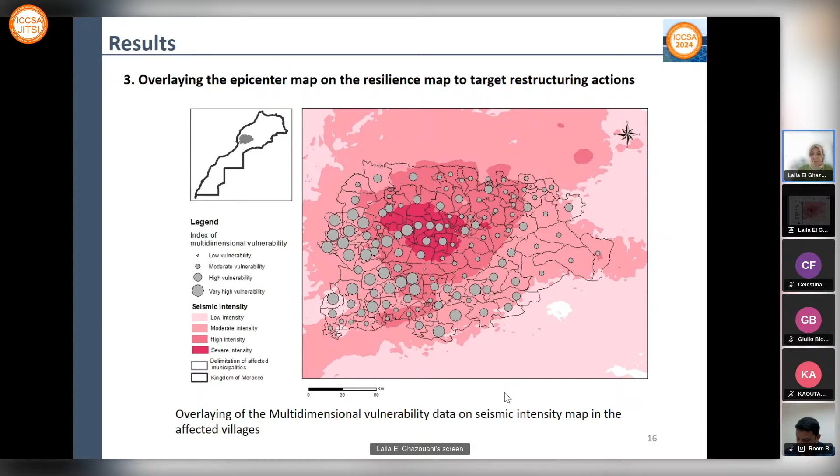So as conclusion, let me say that the present paper aimed to examine the post-disaster effect of the Al Haouz earthquake to guide restructuring actions with this ultimate objective and target of serving decision support processes.

So these findings suggest that socio-economic and infrastructural structures need to be addressed differently so we can make those areas less vulnerable to shocks of this magnitude, especially in villages where isolation is not conducive to the development of employment-generating activities and access to rescue services.

So here we are appealing for more urgent actions to be implemented.

So what about the study's prospects? Morocco will be undergoing another general population census in the coming months. So we are thinking that it will be very appropriate to review and update the vulnerability of these earthquake-affected villages.

So we will be able to compare this updated area over this decade, this 10-year decade, and assess how this earthquake disrupted, how this earthquake affected the areas.

So here we adopt a multi-criteria analysis, and we appeal to decision makers to better prepare and develop comprehensive and sustainable reconstruction strategies that truly meet the needs of affected communities. That's all. Thank you.